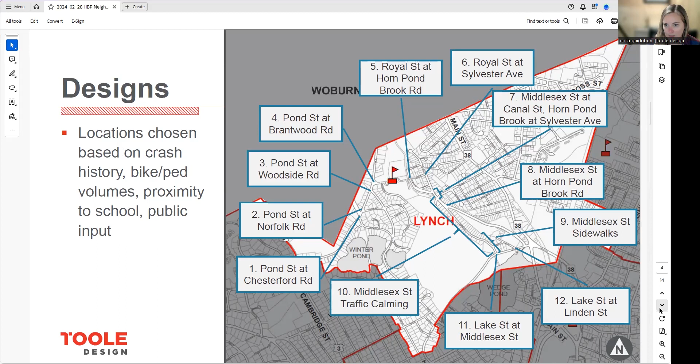I'm just going to linger on this really quickly. I've shown this slide a million times just to orient us all. This is the Lynch district and kind of where all the different nuanced individual projects, we're calling them 12 projects, fall around the Lynch School, with the intention of improving access for people on foot to the Lynch.

So these are the designs. I'm going to start with Royal Street at Horn Pond Brook Road, and then on the other end of Royal Street is Sylvester Ave. Not a lot has changed on these designs. I will say that you'll see that I'm coming to you today with engineered plans. These are the pavement marking and signage plans, to demonstrate to you the progress that has happened since last time.

Last time I came with kind of conceptual drawings on an aerial. And now we're at a place where we've got the survey laid out underneath, and we are actually engineering these things to ensure that they fit, that there's no utility conflicts, drainage, grading, ensuring we're not impacting anyone's driveway access, tying into existing sidewalks, all those things that come into play here.

So the tan sort of represents sidewalk material, concrete. The gray is pavement, and the little bit of green that you see is additional new green space. So nothing particularly to note here. This is a raised intersection, if you don't recall from last time, and this is mostly curb extensions and providing a speed hump on Sylvester Ave to slow vehicles in advance of that crosswalk.

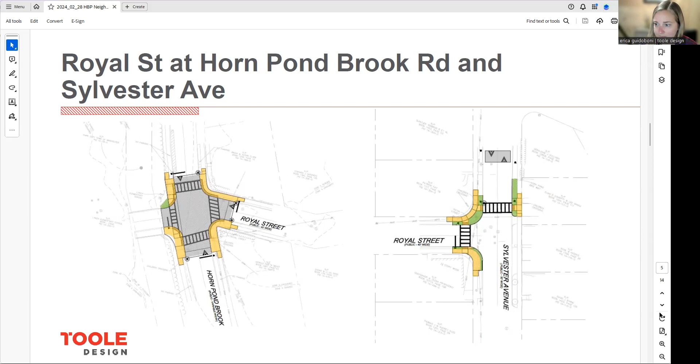Moving down Sylvester Avenue onto Middlesex Street and Horn Pond Brook Road, the one on the left here with the two intersections crossing Horn Pond Brook Road and Canal Street.

We had raised crosswalks. They are now flush with the road and will be curb extensions instead with speed humps. Through design process and survey assessment, we found it would be extremely expensive to build a crosswalk there, with also some detriments to environmental permitting around changing the floodplain storage.

So what we're hoping to do here is still achieve increased visibility of the crosswalks, shortening the length of the crosswalks, and then slowing vehicles down with that speed hump series we were talking about.

So improving the sidewalk on the side of Middlesex Street as well, ensuring we're maintaining any driveway aprons that are there today. There's a small gap in the sidewalk right where Canal Street hits Middlesex Street, where there's a dirt parking lot that goes towards the cemetery. We're going to improve that sidewalk and provide a little apron there.

Moving over to Middlesex at Horn Pond Brook Road with a large green area, that's a larger curb extension. Our intentions there are to provide grass. We did tighten this up a little bit; it was bigger at the last meeting.

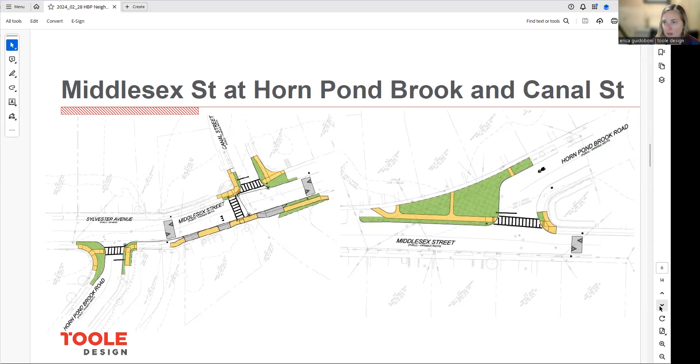There were some concerns about ensuring there was enough of an access aisle at the Horn Pond Brook Road approach. So we're going to use some grass there and provide some trees as well, and ensure we're communicating with the neighbors if anyone lives on that stretch. Otherwise, we're going to reach out directly and make sure we're placing those trees where it makes most sense.

Moving further down Middlesex Street towards Lake Street, a change here is the sidewalk on the park side of Middlesex Street, where there's no sidewalk today. The last plans had them right along the street curb edge, and we're moving them to meander through the park behind the tree line, which we think will be a really nice, pleasant addition to that space.

And along Fairfield Place, maintaining that slight curb extension, providing new ramps that don't exist today, and a new sidewalk that's missing on Middlesex Street towards Lake Street.

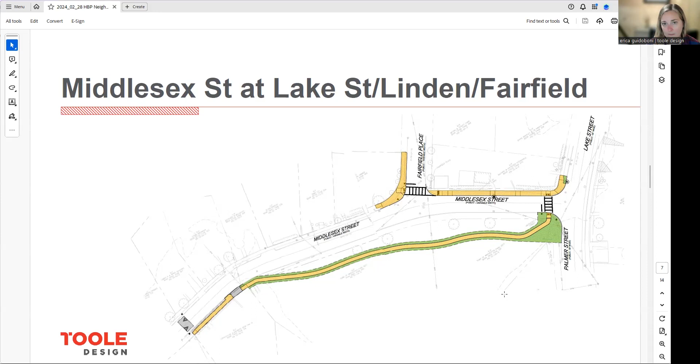I wanted to take a moment to ensure -- I don't think last time we had placed the speed humps clearly. I wanted to walk through those with you today to make sure everyone knows where and why we were placing the speed humps where we placed them.

Woodside Road is a great example of what the speed humps will look like, and what they'll feel like as well. They're not super dramatic. We're trying to strike a balance of actually slowing cars down, but also don't want it to be too dramatic that we're impacting emergency services or anybody.

There are concerns that they can make some noise when they're at higher speeds or volumes. I think that Canal and Middlesex are really appropriate applications for these speed humps, but I think if anyone wants to go out there and ride over these to make sure they have experienced them before, that would be useful information as well.

So we placed these to ensure we're not interfering with any driveway access or any drainage. The grades on Canal Street, which I'll show you an image of in a moment, are a little too steep, where they're not recommended. So we didn't place a few towards Middlesex Street.

Speed humps are spaced about 250 feet apart. You really don't want to space them any further apart, or they start to be ineffective and people speed up between them. Typically they divert up to 20% of volume, which I think could be a great thing given the comments I've heard about traffic diversion going through the neighborhood and avoiding Main Street. So I think that could help a lot. And they typically reduce average speeds between 20 and 25%.

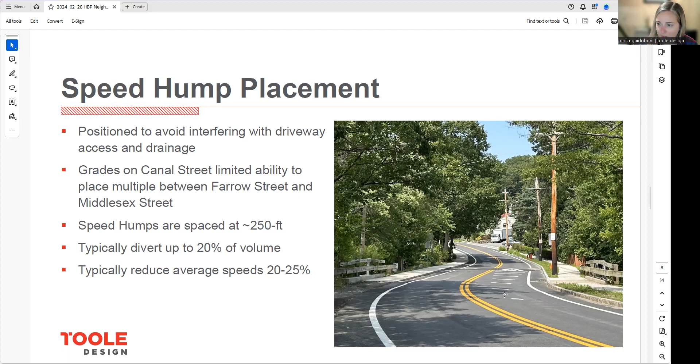So looking more closely at where we were talking about placing these, I put up some house numbers on the screen there. I'll linger here for a moment, and this will be on the website as well. We've got 3 speed humps on Middlesex Street towards the end, along the straight piece of Middlesex Street, which we think is important.

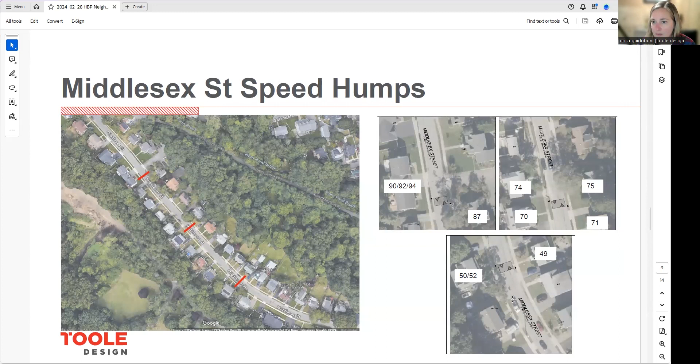And then Canal Street, we've got 4 more, and those are the house numbers as well. And again, we had to avoid between Farrow Street and Middlesex Street, as the grade of the road is not appropriate for this application.

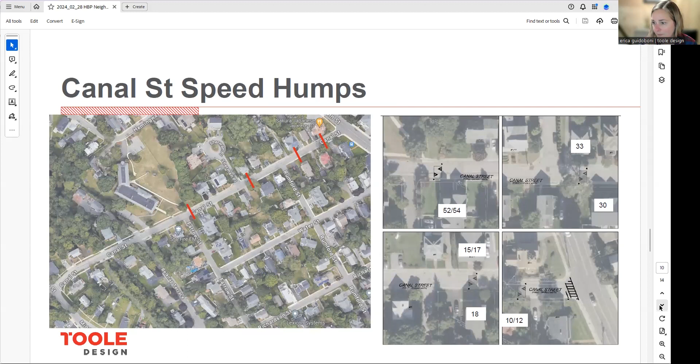Next steps, I sort of covered it, but just a reminder, we're in final engineering at this point. So we're hopeful that we are aligning with the goals and the needs of the neighborhood through this plan. We are going to a Spring Town Meeting in April. Construction will begin this summer through the bid process. And we will be coordinating with the school project to ensure that everything's completed before the school year when the school opens in fall of 2025.

It's the end of my formal presentation.

Thanks, Erica. I realize there were some comments that came in during your presentation, and I kind of jumped the gun and started responding to them, but maybe before we get to other folks, I'll just say the comments that came in and what the responses were. One was just an interest in what the opportunities for public comment were from a resident. And I mentioned some of the outreach methods we took, including sending letters to the neighborhood, having the website and posting it up on the town calendar for the meetings, but then a comment period. And she asked for some additional information, which I can provide offline.

There was a question about traffic patterns, specifically, will Royal Street be made one way during pickup and drop off? And I noted that the scope of this project is really a traffic calming and safety project, and it didn't really look at the overall traffic circulation in the neighborhood, or any impacts of the school. There was a study for the school that was done, so we're not envisioning that at this point. However, the improvements being proposed wouldn't stop or preclude any changes to traffic patterns in the future if the neighborhood felt that was something they were interested in.